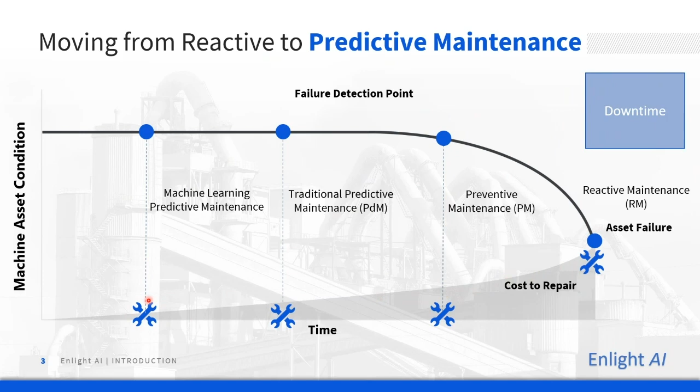And when we look at the market, we find various different methods for predictive maintenance. The first, and again, the more traditional type, would be the acoustic and vibration sensors. Most of it vibration sensors, acoustic is also now emerging, but the point is these are hardware-based solutions. They all require the installation of new instrumentation in the plant.

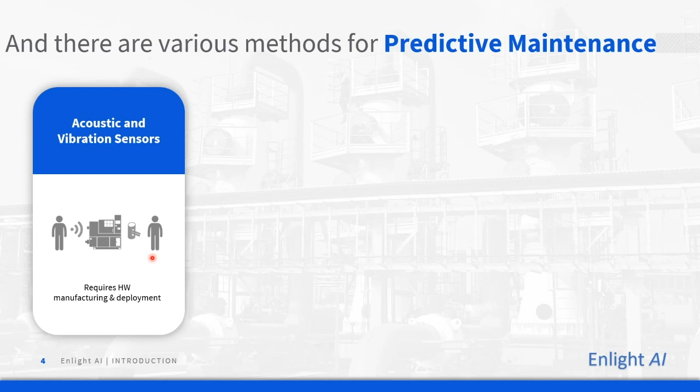From the other side, we have 3 different types of software-based solutions, where the first one would be the well-known digital twins, or in some cases expert analysis. So in that case, a model of the machine, a digital model of the asset. When we speak of the digital twin, these are physically based models or simulations of the actual assets, which means that in order to generate such a model, it requires or even relies on the expert's knowledge. And therefore, this is usually the OEM solution.

Then we saw the market moving a bit further into machine learning based solutions. In that case, manual data-driven modeling. So as opposed to a physical model, which is built from a bunch of physical equations, here we're talking about data-driven models, machine learning models, statistical models, which are built from looking at the data without incorporating the physical equations into it. And we have today in the market various different types of model generation environments. And the expectation is that the customers will have their own team of data scientists, capable to work with these environments, take the machine data or process data, and build their models by themselves.

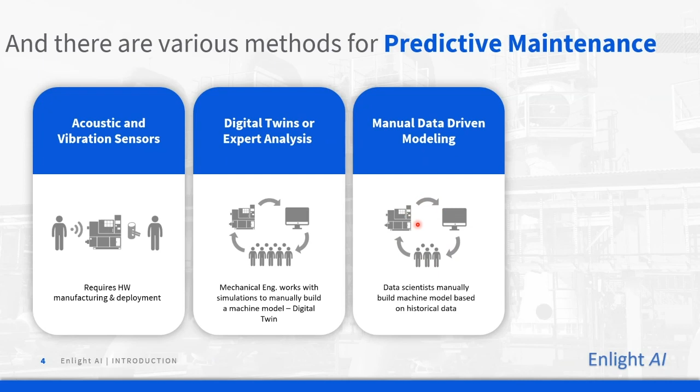And here I would say that the main gap is that these two methods are based on manual work done by data scientists or engineers. Eventually, if the model is built manually, whether physical or statistical, it means that someone will need to continuously maintain the model, adapt it, verify that it's right. And because of the labor-intensive work of building and maintaining the model, we also see today in the market the development of automated machine learning based solutions.

As with many other things in our lives, automation makes things easier, and in that case, most of the work of the human data scientist was automated, and therefore there is a very limited dependency on humans in the loop here. And we will dive deeper into AutoML in a few more slides.

But just to try and summarize, this is our view of the market and the segmentation into the various different types of solutions that we found out there. Each one of them, of course, has its own advantages and challenges. So when it comes to accuracy, in most cases, the expert knowledge-based analysis would be the most accurate. When it comes to identifying the root cause, vibration sensors usually provide the better insights towards the failure mode or the root cause.

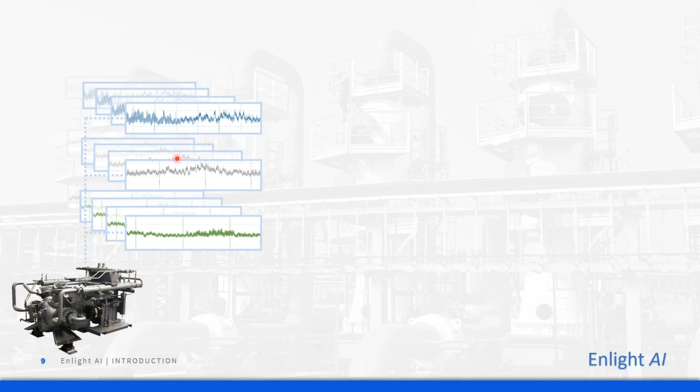When we started the development about 5.5 years ago, we came to the understanding that we probably won't be able to find or develop a single modeling algorithm that can fit all these thousands of different cases. And for that reason, what we've done is build a toolbox, a toolbox which contains dozens of different modeling algorithms, each one with its strengths and weaknesses.

So we have this toolbox with a set of modeling algorithms. Now on top of it, the second part of the work, after assembling or starting to collect or develop these tools, is to decide which one to deploy on each sensor. So there's a fully automated mechanism in the software that evaluates and decides which modeling algorithm is the best one to use on each and every individual sensor in the system or in the customer machines.

So this is the first part, the auto selection of the modeling tools. And as I've mentioned, machines eventually either grow old or go through maintenance or overhauling. The process changes. So it's always important to validate these selections. In many cases, they could have been made half a year or a year ago. So we need to make sure that the level of performance of the models is kept.

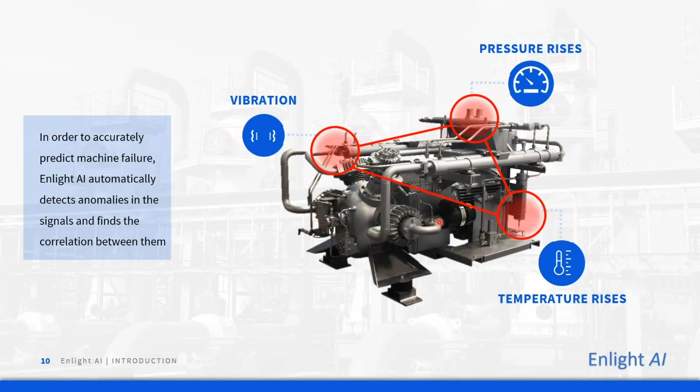What is even more important is to then find and extract the patterns across multiple sensors, to identify a specific failure mode or failure pattern, and use these insights as an indication of upcoming failures. So Enlight AI starts with anomaly detection on the sensor level, correlation detection across all the sensors in the machine, and eventually the failure prediction alerts, which are based on features extracted from the data. In a bit of data science language, feature extraction basically means extracting indicative metrics from the data, whether from the raw data, from the anomalies detected, from the patterns detected, etc.

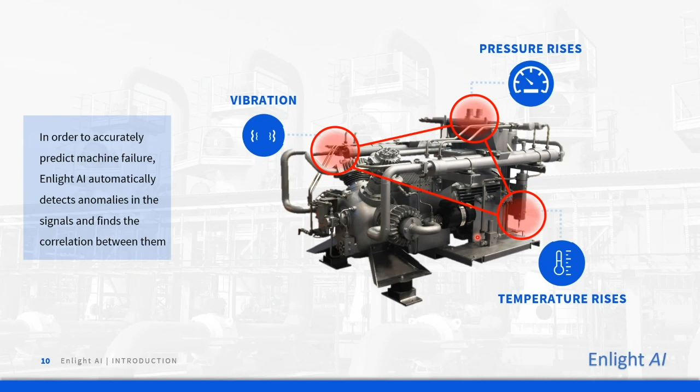How does it all look to the user? What will you see? So, of course, putting all these insights into an intuitive and user-friendly user interface is important to make these insights actionable. For that, we have several types of visualizations, starting from the global overview that can show multiple sites, then diving deeper into the specific plant or factory view, where you can see the distributions of all machines monitored, statistics over the downtime and MTBFs.

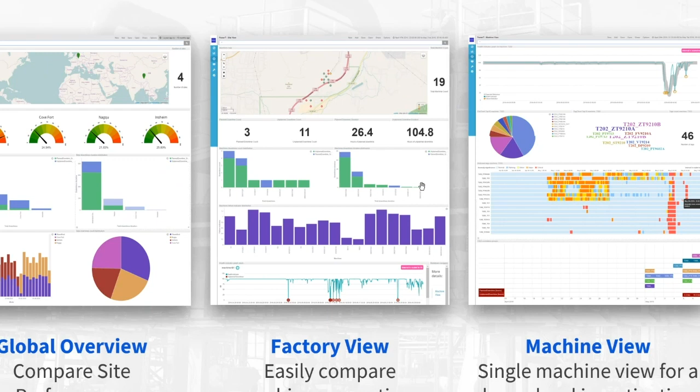And of course, for the technical teams, engineers, technicians, it's important to understand what's going on within each machine, right? So in that case, you can see an example of an anomaly map. All the sensors in the machine, starting with a light blue area which reflects normal behavior, and then anomalies are detected in a group of 5 or 6 sensors here, which eventually leads to the red area, which is the downtime. And in that case, a prediction alert is sent here once the pattern is detected, while the downtime is only a few days later.

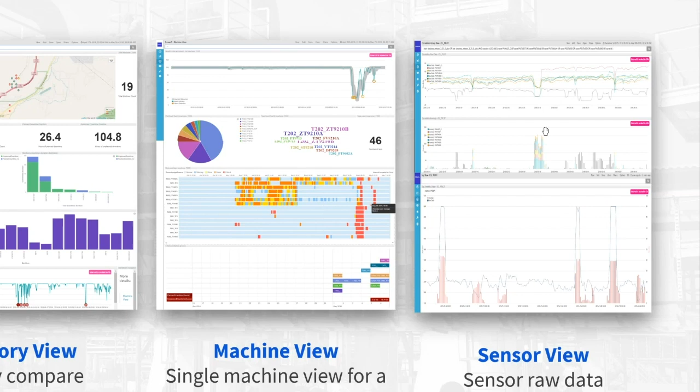Again, as an engineer myself, I really like to know the details of what's going on, and for that we have another view, which is the sensor or tag view, trends view, where we can see the specific anomalies detected in each sensor, whether spikes or drifts or changes in frequency, temporal outliers, contextual outliers in data science language, and also the group of correlated sensors, which all exhibit abnormal readings in a time period. And here what we can see is that perhaps this black sensor on the bottom has the first anomalies. This could be the origin of this chain of events which leads to the downtime. So alerting, assisting in detecting the root cause, and aggregating the insights.

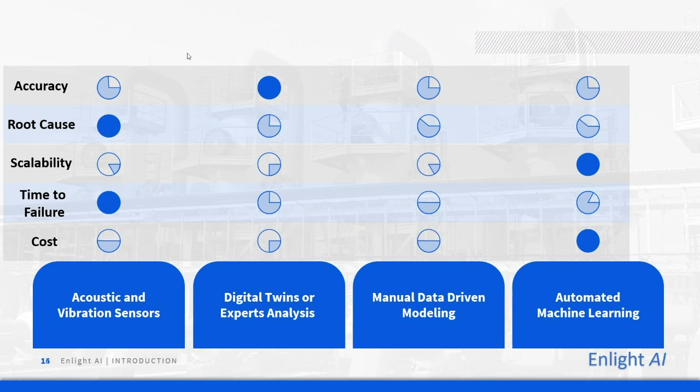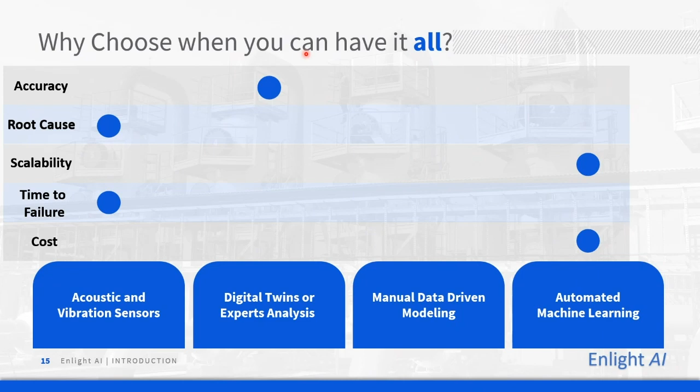But the question is, why choose when you can have it all, right? In some cases, a hardware-based solution would perform better. In other cases, AutoML would perform better, or digital twin. And the question, as I said, is why choose when you can have them all? And one of the main drivers for SKF to acquire Presenso and for Presenso to get acquired by SKF is the strong synergy in combining all of these types of solutions together.

And today as SKF, we provide all of these solutions, and therefore an end-to-end, I would even say tailor-made solution for each customer depending on the needs they have. So if we're talking about legacy equipment, old plants which are under-instrumented, we have the series of IMx, which are online vibration monitoring systems. When it comes to expert analysis, we have our rotating equipment performance centers. So regional centers across the globe where data is flowing in from the field in real time, mostly vibration data, to be analyzed by experts. So expert analysis.

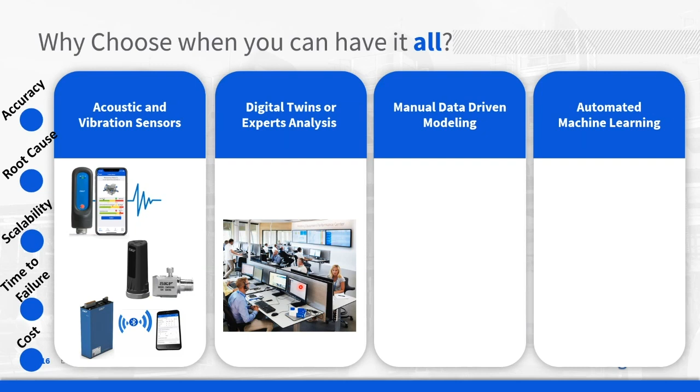There are different solutions, again, evolving around vibration data analysis, which use advanced machine learning techniques. In that case, they qualify as manual data-driven modeling. And now, after the Presenso integration, of course, the automated machine learning, which gives the angle of the process data, not only vibration, but moreover the process data. So basically, an end-to-end solution that could be really customized as per the customer needs.

And another strong synergy is in what we call the hybrid solution. Basically taking these machine learning based solutions with manual modeling, with expert knowledge and the history of roughly 115 years of monitoring and analyzing vibration data, and incorporating it into the automated machine learning. So transferring a lot of knowledge from subject matter experts to the algorithms to provide a hybrid solution, and the term hybrid is used because it's a data-driven approach and an expert knowledge-driven approach, combined together into one single solution.

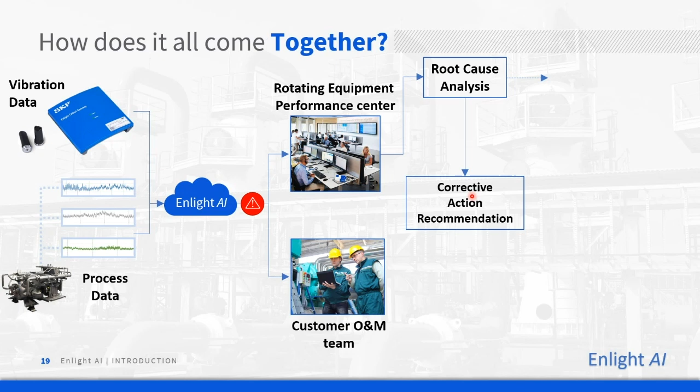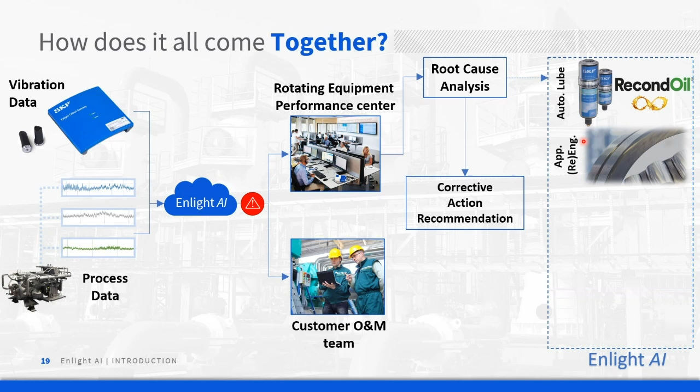Corrective action recommendation could be tied specifically to the bearing in the field and could be also tied to lubrication, lack of lubrication. If it's a repetitive failure in the same bearing, perhaps re-engineering and finding a better bearing for that specific application is the corrective action. Of course, remanufacturing if needed, and supply chain.

So all of these are in the back pocket of the people in the RDCs, or remote diagnostic centers, in order to provide the best mitigation or corrective action recommendation back to the customer. And this slide summarizes the whole cycle, I would say, from the technical or service perspective. And as you might recall, at the beginning of the presentation we were also discussing the disruption that this new technology causes when it comes to business models.

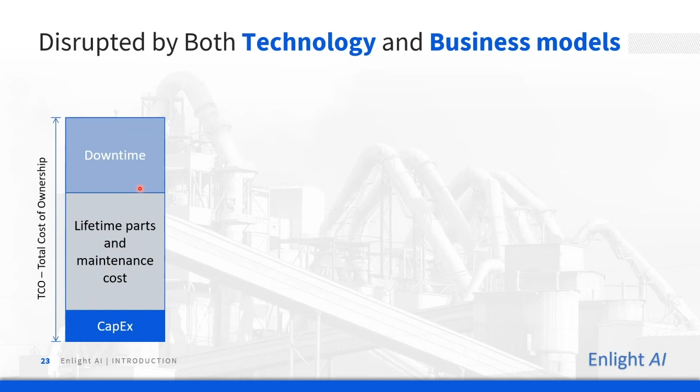And looking at the business models, as discussed, the total cost of ownership is pretty much comprised of these 3 segments. Looking at this traditional business model, the OEMs would always want to sell more, right? Sell more equipment, sell more bearings, or sell more machines or spare parts, while the end user's incentive is to buy less. And this results in an inherent conflict here.

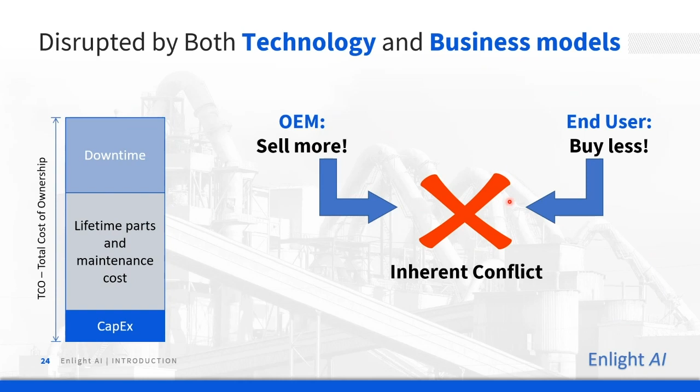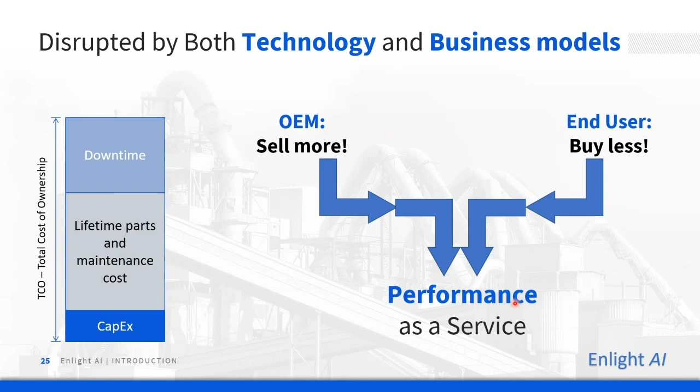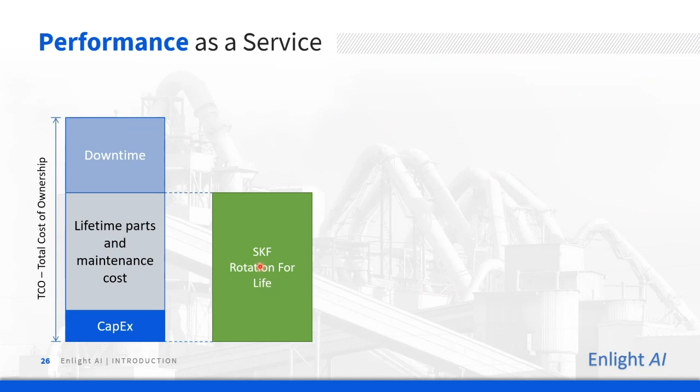And in order to align the interests and overcome that inherent conflict, what we believe in today is performance as a service. This is the way going forward to align the interests of the OEM, or the equipment or component manufacturer, and the end user. So in SKF today, when we look at this model, we offer Rotation for Life type of contracts, which is a service contract, where we work together with our customers to reduce the downtime to the minimum possible, to generate savings, which we then share with the customer in a fixed fee and performance-based business model. And this is how we align the interests of our customers and ourselves.

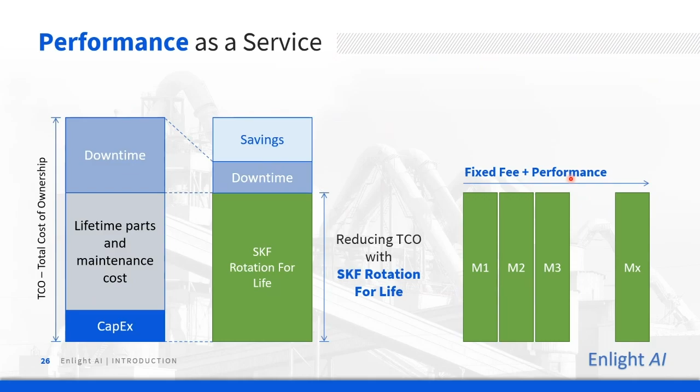To summarize, eventually, our focus is on cost-effective and reliable rotation. And looking at this new Industry 4.0 era, we have all the enablers to do so. Starting with digitalization, whether the data analytics part or the connected supply chain. We have these new business models, from transactional to fee-based plus bonuses, the performance part. And eventually, I think a common driver that should be important to all of the players in the world is striving for a green, circular economy and reduction of our carbon footprint.

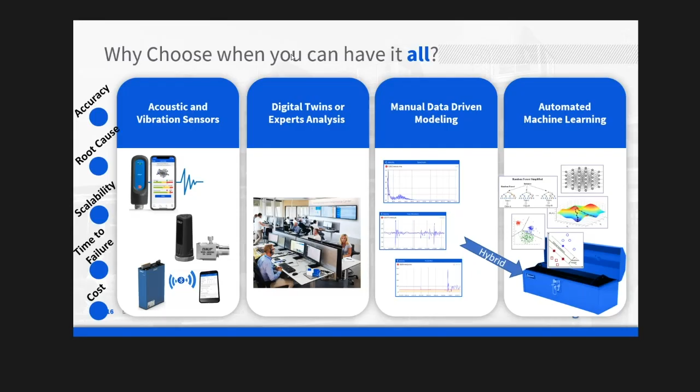Are these models of predictive MT available? I'm not sure I completely understand the question, predictive MT, but all these models that I've presented in this slide, or even better to look at this slide, all these models are available. I mean, this toolbox is there, fully operational. The models are being trained and built per specific use case. There is also the option to transfer the models, what we call transfer learning, from one machine to a similar or identical machine to shorten the training process. So the question was, are these models of predictive MT available? Yes, they're all available.

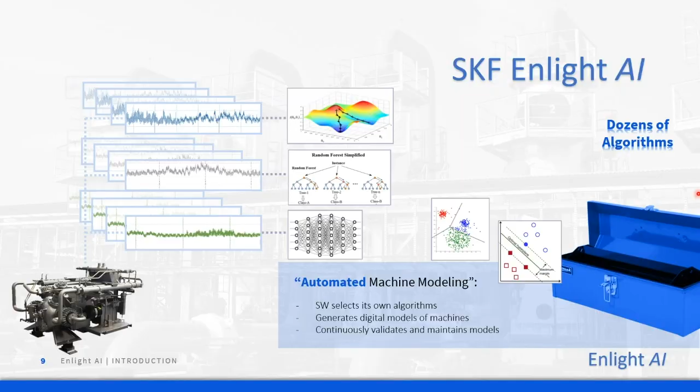Roughly speaking, again, it depends on the use case, but somewhere between 12 months to 24 months, I would say. The more, the better. So we train on historical process data. We train on historical failures. And then the configuration time or the deployment time of the solution is within, let's say, 3-4 weeks.

The next question is here: why doesn't AI predict root cause, as it is still getting data from particular sensors? Good. AI is able to detect root cause, yeah, as we've seen in this example here.

Clearly, in that case, this pattern is regarded as the root cause, yet at this point, the software will provide an indication of which are the most abnormal sensors and which are the correlative patterns detected for which the alert was sent.

In the future, and this is currently under development, again, also incorporating expert knowledge from the SKF side, is to present the exact root cause identified based on historical events detected or trained on in the past, and based on some level of expert knowledge injected into the system. So AI currently identifies the more suspicious behaviors that can be regarded as a potential root cause.

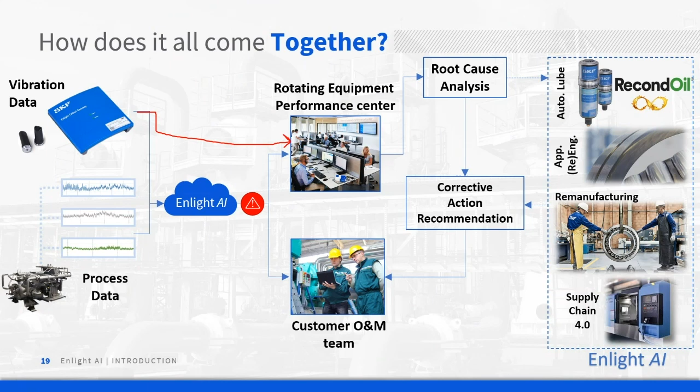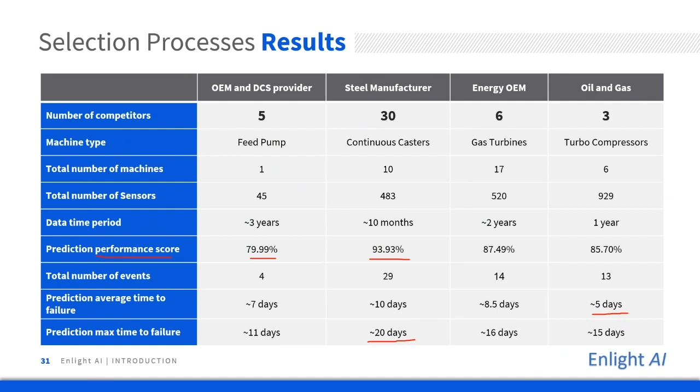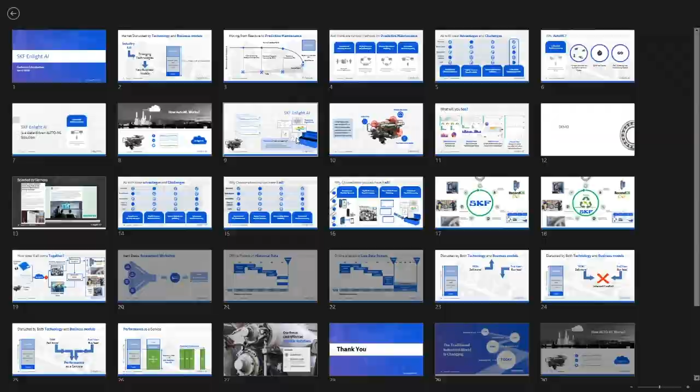Which process data contains the most valuable information apart from vibration sensors? So this is really process dependent and machine dependent. It really varies from one use case to another. We're talking about temperatures, motor currents, pressures, everything that is in the process data, but it's a good point because we don't want to take garbage sensors, let's call them.

So we do conduct a workshop with the customer, which is a couple of hours, to understand which sensors we should focus on. We do not want to flood the entire analytics stack with sensors which are meaningless. And there are also statistical measures to reduce the number of sensors and understand which are the more indicative ones. You can read about PCA and feature extraction.

How accurate is the root cause failure analysis provided by the system? Is human interference required? So yes, when it comes to root cause failure analysis provided by the system, currently Enlight AI provides the list, or the representation, of sensors which were found to be the most abnormal. Still, we learned that it's more of a suggestion for the customer to start investigating than identifying the root cause.

And in that sense, there is work in the back, on the development side, to incorporate some expert knowledge, whether from the customer, some failure modes that they consider more important, or from SKF, which has a lot of expertise around failure modes in bearings, to be able to make a more deterministic identification of the root cause. This will be released in the upcoming month.

What other parameters other than temperature, pressure, and vibration can AI measure? So AI doesn't measure any parameter. AI analyzes the data and again takes everything in the historian, whatever the customer can provide.

Okay, the value at stake, I meant the value at stake for specific equipment like vertical mills in cement plants. So of course the value, you know what, let me give you a nice example from cement. Working with one of the largest cement manufacturers, the value at stake for them if they don't use predictive maintenance in general, and predictive analytics in particular, is downtime, and painful downtime. In many cases, such downtime can put the entire line out of production for hours and even days.